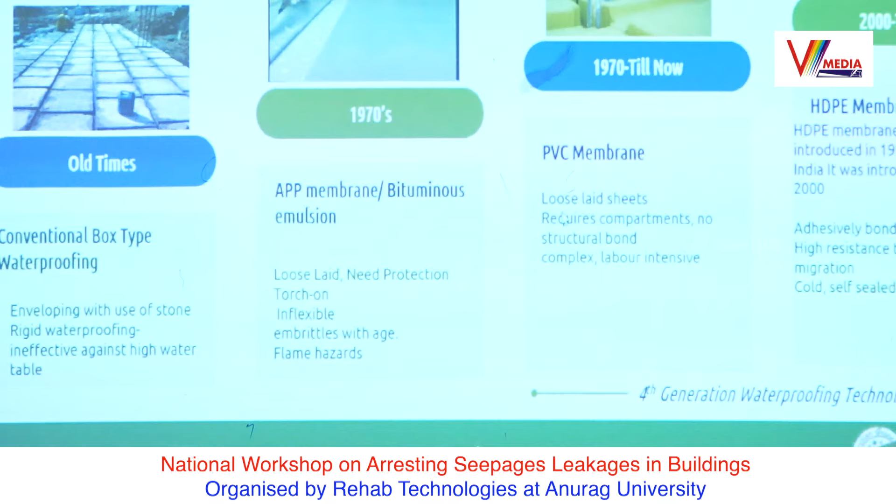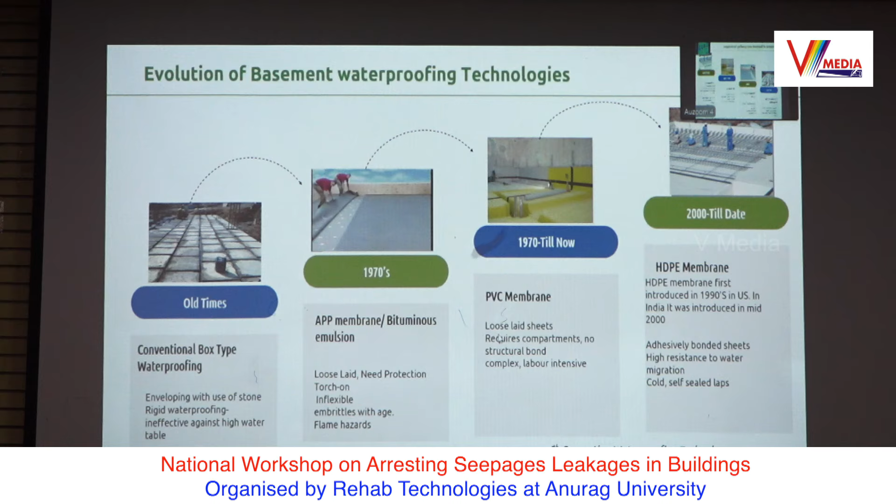So then the first generation product, called APP membrane and bituminous membrane, came into the picture. What is APP? It is basically an atactic polypropylene based product, a polymer based product actually. It comes in a sheet, black color sheet, like two gentlemen fixing the sheet on the roof. It was loose laid and needed protection.

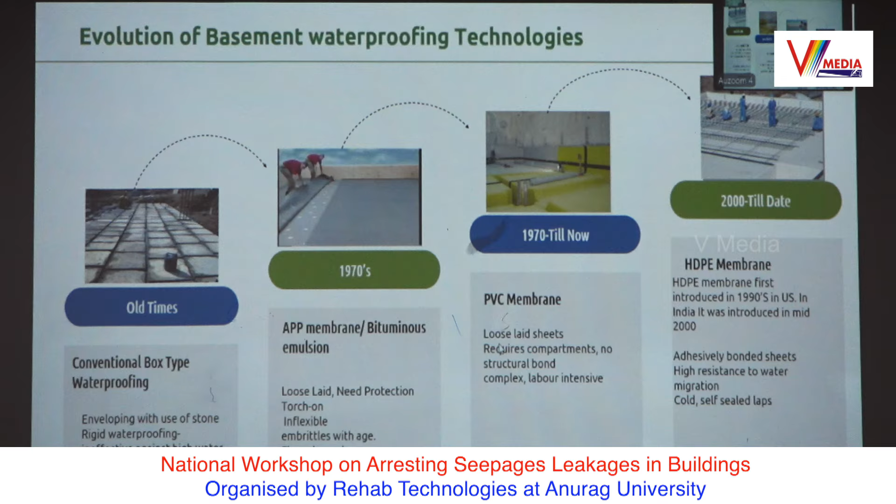The awareness of waterproofing was very less, but in the 1970s - we are talking not in India, it is outside India, where people started long back - after that, PVC waterproofing came.

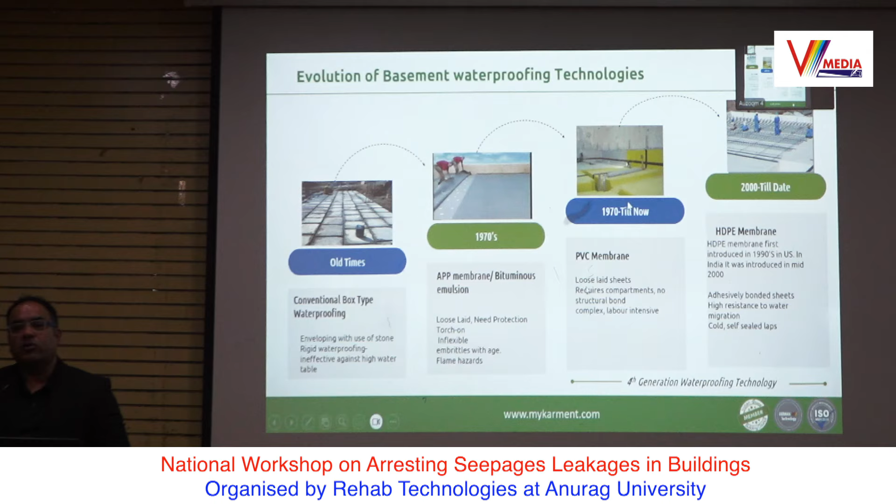PVC is nothing but polyvinyl chloride. Again, it's a component drawn in the form of sheets. You must have heard of PVC pipes - everybody has seen a PVC pipe. At a certain temperature, they draw that material into sheets, and that again gives a lot of protection.

So it is mostly PVC and SBS membrane. The difference between them is the flexibility part.

We should be aware of the weathering effect of any product. Anything we design today, as per EIL or big departments, whoever designs the subject - like IITs - they normally design a structure for 100 years. So when they design a structure for 100 years, the material has to perform in line with the structure. That's why you can see the advancement we carry today in building materials.

This is one of the reasons - today we are more eager to have structures protected for more than 100 years, even 200 years. Some people are asking for warranties of 50 years nowadays, so these are things where we require advanced materials.

One of the advanced materials - it's not very old in the market, almost the last 8 to 9 years - is called high density polyethylene membrane, and it supersedes the majority of membranes in substructure waterproofing. The complication was, whenever you have a steel design, sometimes the tower is almost 80 floors - you can imagine the raft, the depth of the raft, the kind of steel they will use there, it will be very dense.

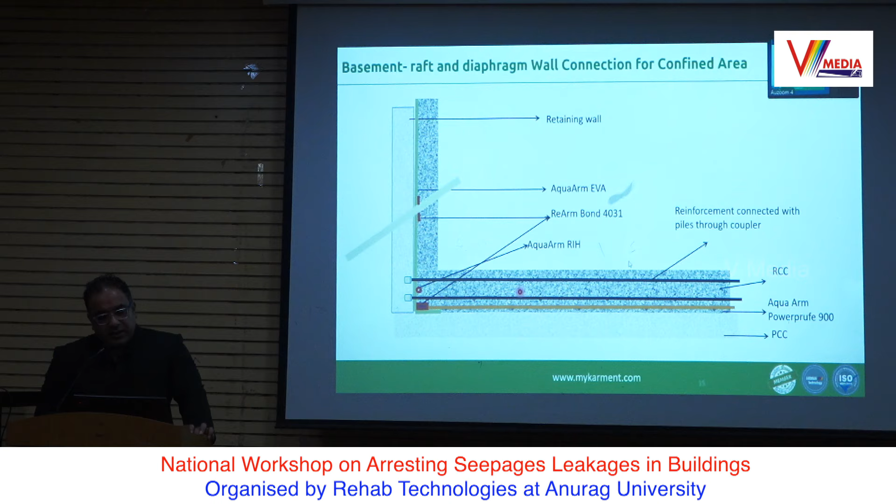You can see this is the internal area, wherever you go in the basement normally - this is the internal area, and this is the outside area. We call it confined and non-confined area. This is the typical way we do protection from the outside, not from the inside. Any kind of protection we do is from outside, not from the inside.

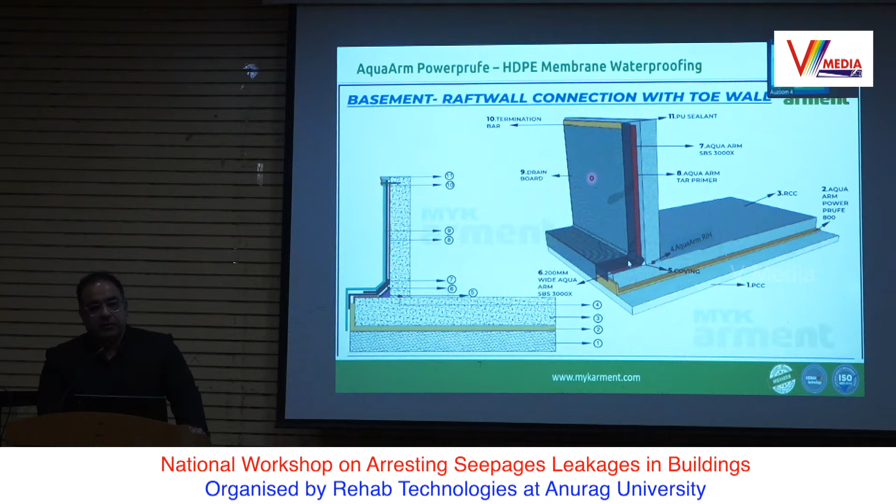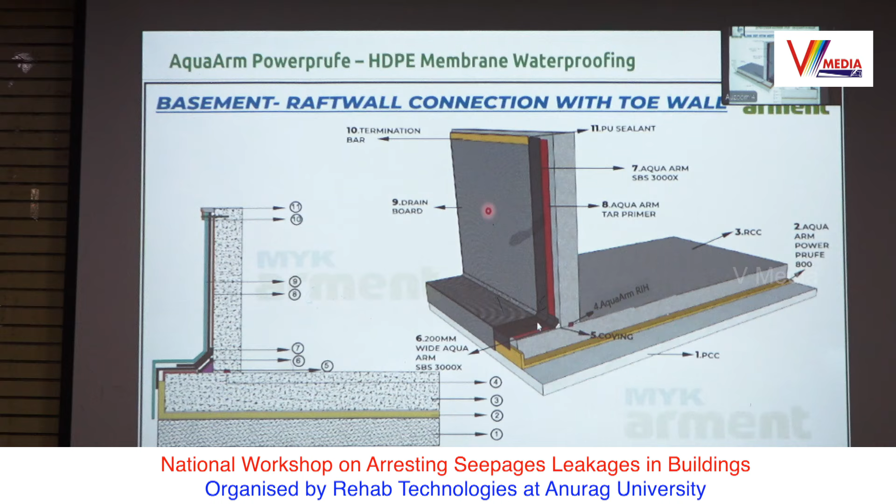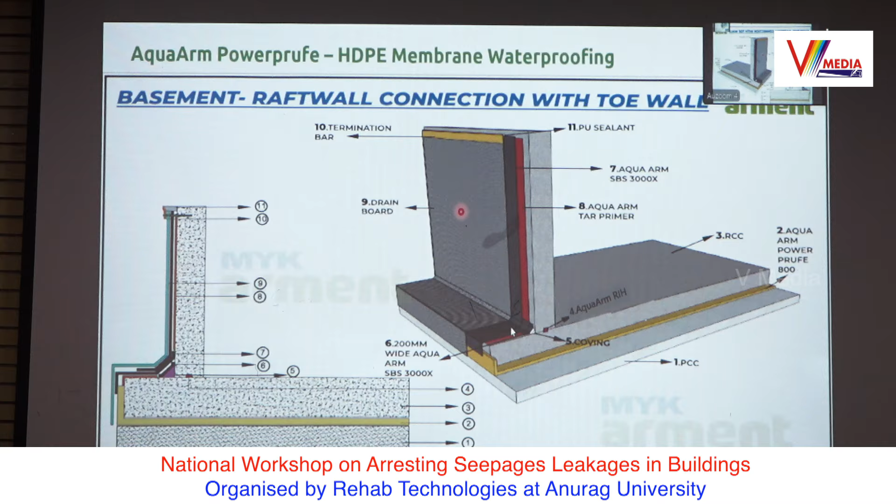So you can imagine a bucket. A bucket has water, right? You put water inside the bucket. Imagine you are doing protection of the bucket from outside, so no water can come inside, right? Only once you put water inside does the bucket get filled. This is the simplest way of understanding basement waterproofing. We call it a cascaded system from all around, and we will not do protection from the inside - it's not good under negative pressure.

So again, these are some typical diagrams I am showing you. Different combinations, different products together make one composite waterproofing system, which we guarantee sometimes for 15 years, 20 years, 50 years, depending on the workability of the work.

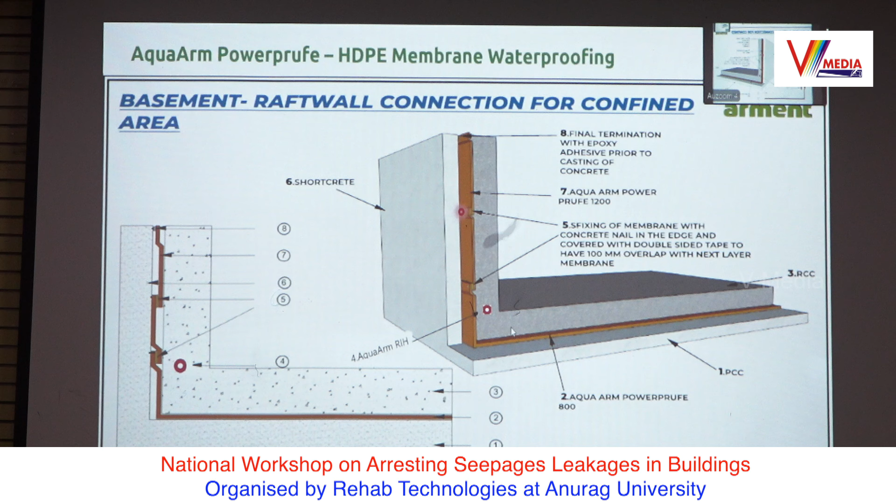This is the example I was telling you - this kind of steel you can see everywhere, or these kinds of piles you might have seen when you go to Hyderabad, in High-Tech City, Financial District, or even Kokapet. You see a lot of buildings have piles. What is that actually? There are a lot of designs in foundations nowadays.

The membrane can take the shape, and it is cold applied - no hot air is used. This is the normal practice we do. We understand the surface, whether it is hard or loose, and we have to clear it off. Then, before laying the membrane, we have to loosen it because it comes as a long roll, and sometimes it has a lot of curves.

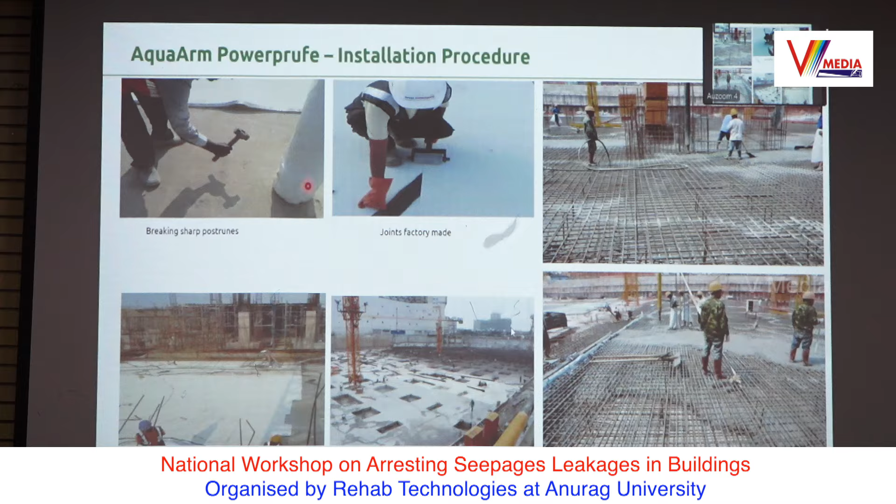Then we do the joints - there are very nominal joints at the corners. The membrane almost stands here, you can see. It is 1 meter by 20 meters. Normally you have fleece on both sides, 50-50 mm. There is a sticker there; you remove the sticker and straight away apply the material on top.

Imagine this is one of the typical sites you can see. So how do you apply the membrane? You can see the blue and white color - that white color is the high density polyethylene membrane. Okay, was that interesting? Good.

Now the second interesting topic I'll take up on waterproofing is roofs. The roof is not just a roof anymore nowadays - different places have different requirements, different uses. Some places have a car park, some want a roof garden, some have a lot of gadgets or fixtures on the roof. It could be a data center with thousands of things needing a lot of cooling. So a roof is not only meant to be a roof today - it has a lot of uses. Roof protection is very important.

Do you agree? When you design a roof, what considerations come first in your mind for any kind of protection system you want to produce? What should the system be? How should the system be? It should have good physical properties, right?

When you go for a purchase of a car, what do you see? It should be good looking, aesthetic, give good mileage, and it should be cheap. That is also in our mind all the time. But what happens when the dealer says, no sir, it is not cheap, you have to pay for EMI. This could be the parameter.

Same goes for any kind of building material when we choose for a building. The first thing in our mind should not be cost. It is a technical product. Whether it will work for my structure or not, that is the most important thing. So the most important thing will be good physical properties.

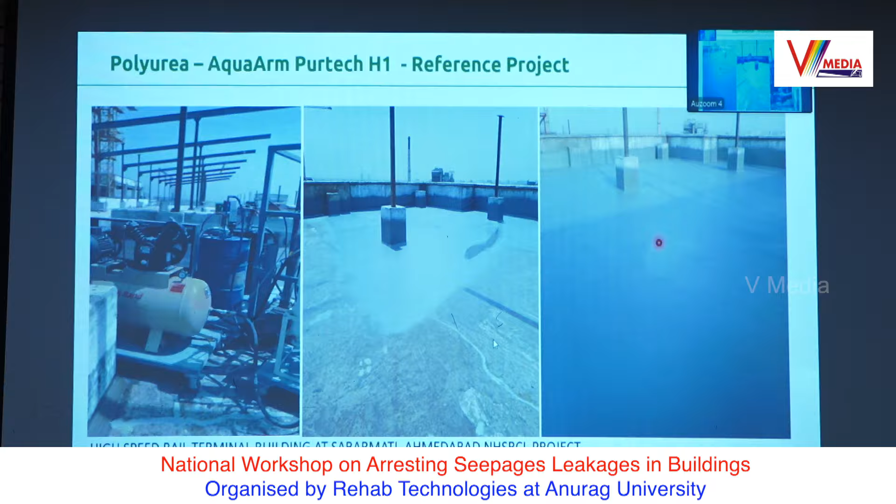These are some examples where we have done this, for one of the areas we have done. So you can see some videos so you can understand. This is one of the very typical machines which is normally used for spraying polyurea. Polyurea is basically a material with A component and B component.

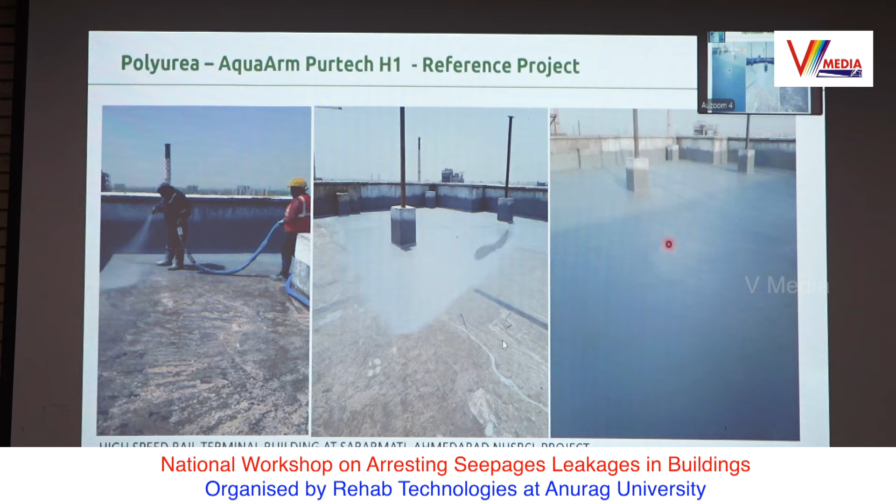Normally it's mixed in a chamber, a very specialized machine, more than 100 degree temperature is there. It decomposes the material and makes it in the form of a spray. Very different kind of product, very fast setting, it can set within 30 seconds, and you can move the subject on this coating after maybe 1 hour.

So this is one more product, this is for sunken areas. Sunken areas are one of the biggest problem areas actually. Sunken basically could be your wash areas wherever you have water inside your flat or building - it could be a wet area, a toilet, a laundry area, or sometimes a balcony. Those are the typical areas.

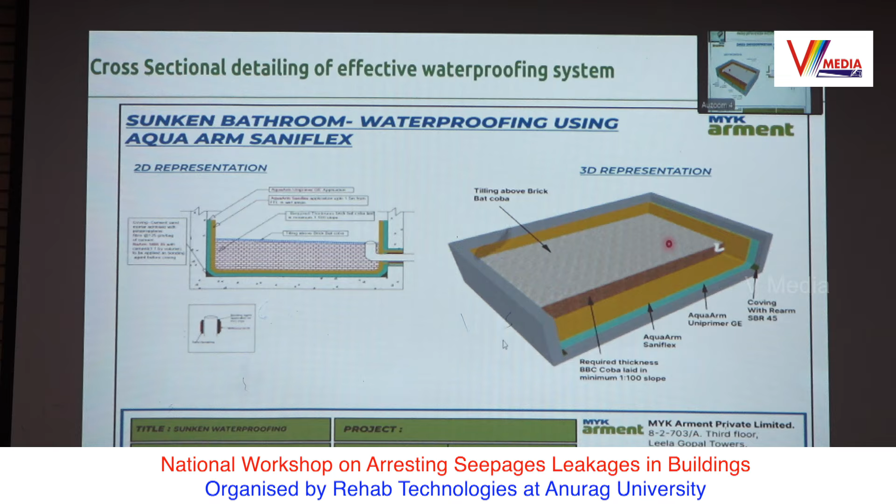So we have a product normally for when you do waterproofing in the bathroom - you will have different systems there. We give a very simple system. Let me show you with a picture now, better. This is a typical bathroom you can see.

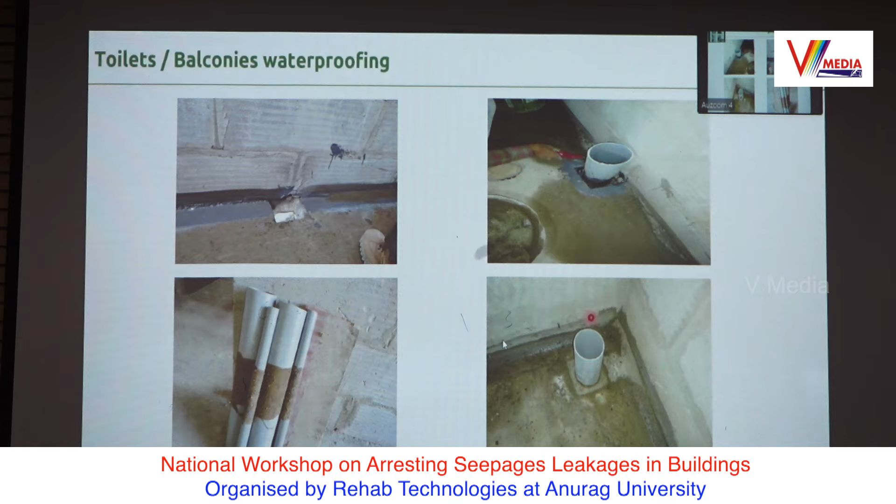Normally you do the core cutting here where you have to put your pipes. These are the pipes typically. You have to do a little working on the pipes - you fix your pipes, do the grouting on the pipes, and the pipe is ready for the commode or whatever you are using. Once that is done, we have a specialized material called Saniflex.

Saniflex is a vulcanized rubber based product, which is hard to find in the market. We are the leaders in this product for the last 25 years. The exclusivity of the product is that anybody can visualize with the eye that this color is very clear, yellow color.

So nobody can cheat you saying waterproofing is done, but after 6 months you see the leak is there. This is a yellow color coating, 2 coats, 1 primer coat, and you make the fleece like that. Once you do that, the structural waterproofing will be 100% intact because you are first treating the areas where you can have a leak.

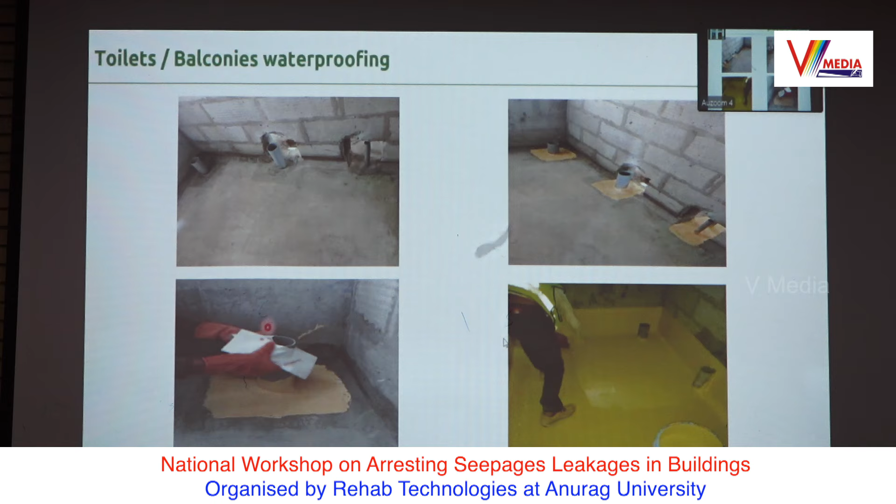That is all your penetrations. Once your penetrations are done, this is the way of the sleeve we do - below is the waterproofing, then a specialized rubber based product which requires plaster. So it will add another extent of dead load on the structure. Dead load is a different component, we can discuss some other time - I have done a lot of research on dead load and how it changes. So small things make a difference in the structure.

Now I will give you another brief area - like when you have gone to any kind of industrial plant. We are talking till now about buildings only, but a building can have different uses. When I have a building which manufactures electronics - everybody loves iPhone, right? Now iPhone is going to be manufactured in India. When they want to manufacture in India, those facilities will also be of very high standard because they are going to manufacture high standard products.

So we have products which go into the electronics industry, food and beverage, any kind of engineering, institutional, logistical, pharma - we are almost supplying to the majority of pharma here, automobile, textile and chemical. Now you will think, what is that actually? I was talking waterproofing, but why am I talking flooring now?

So flooring is also a protection. It is a protection, but we don't term it as waterproofing. It is a protection inside and it covers your concrete in such a way - the thickness is not very high, not more than 1000 microns, around 1 mm, but it can withstand pressure, acidity, any kind of chlorination, any kind of sulfuric acid penetration, and any kind of water ingression also. So it protects your structure from inside, right?

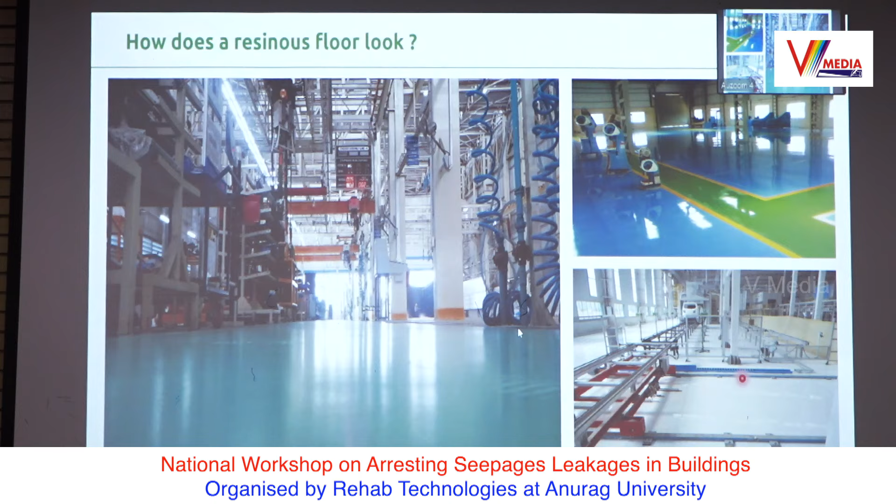Clear? So these are beautiful pictures you can see. It is not costly actually. The thing is, if you go to any basement, it feels very shabby nowadays, smelly, dark - we don't want to park our car there sometimes. It might be good at the beginning of construction, but after 3-4 years, no oil spillage, no tire marks, no smell. Majority of big cities in India - we work exclusively with DLF, Sobha and Godrej. Pan India, we are the only supplier for them, supplying all these products for beautification. The idea was to give them aesthetics - when anybody enters the building, the first thing he will go to is the basement.

So those products are not very expensive and it is a very open technology now. No, only for the basement, sir.

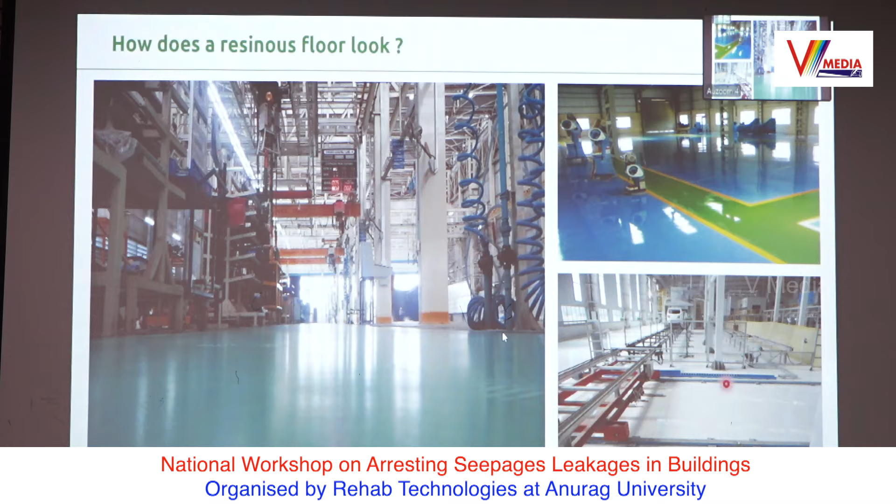Only. Don't forget, before any treatment you do on the surface, always check the moisture. Is it moisture tolerant or not? It should not absorb water, because only when it doesn't absorb water will it create a film. So we should always understand the moisture should not be more than 3%. Anything more than 3%, we should not apply any kind of waterproofing or protection. Simple terms, simple things.

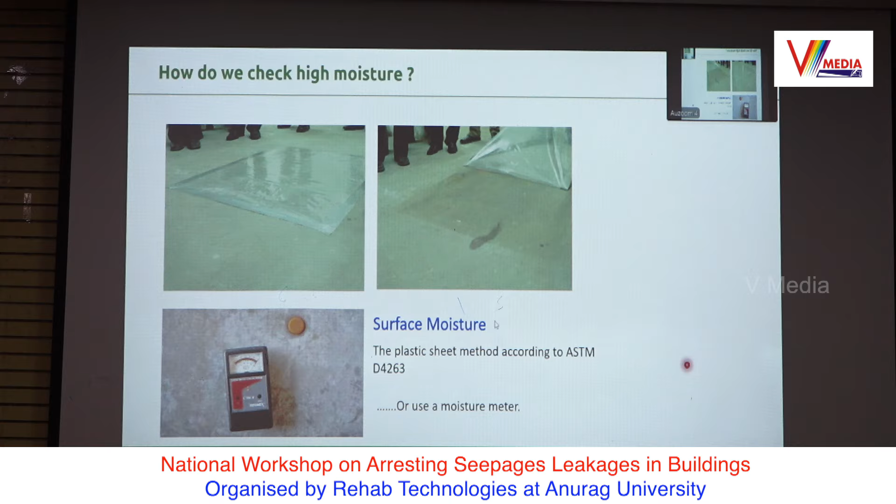Yes sir, there is no flooring tile now, only RCC will be there. You can do it on RCC also, or they might do a screed. VDF is not always required. In India they require VDF a lot because they don't do correction in the screed only, in the RCC only there is no slope. But internationally, how they say it should be done on the RCC actually, because RCC already comes with the slope there.

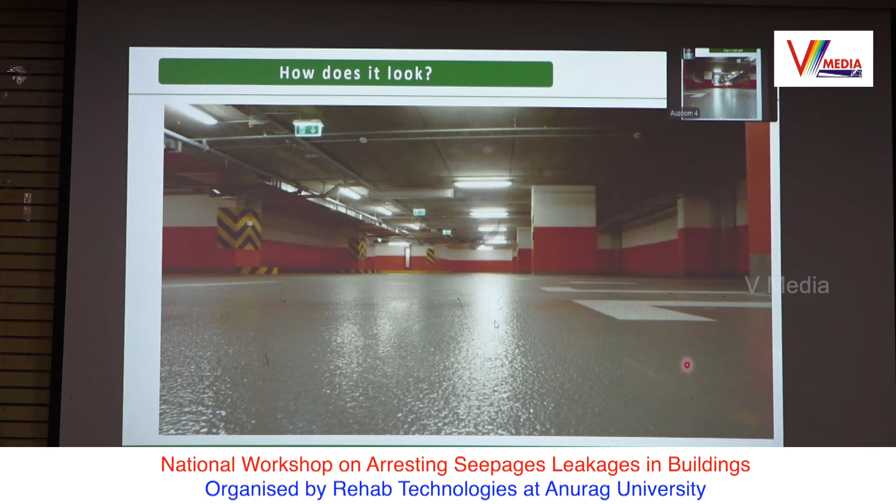It is anti-skid, that's the class of the product, it doesn't let your tire skid. That is the first property. Abrasion resistance is the second, because it will not degrade your floor further. It is giving gloss at this point because it's night, but you can see this is the matte finish now, there is no gloss in that.

So last point now, the biggest area you have where you have leakage. Nobody has spoken till now, I think I am the third speaker only.

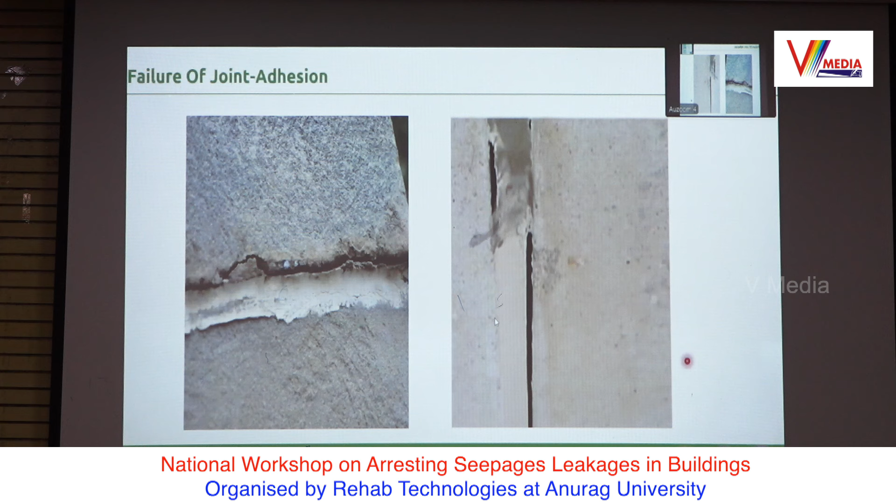Any podium, any roof, any place you have a leakage which will be from the joint. These are typical things which you find normally in your buildings all the time. In your nearby, you will see always sealant is cracked, corners are broken. So what is the problem here? Why does the sealant crack?

See, sealant has a component called MAF, movement accommodation factor. How much it can move, it can take elongation, and it can have coefficient of restitution sometimes - how much it can expand, how much it can come down. So what happens sometimes, we don't choose a product which has a higher MAF. I will choose a rigid product and drive my car every day over it. So what will happen? Rigid product will break, right? It might not break from the middle, it will break from the corners.

So these are like two ions, hydrogen and hydrogen, H2O, H2O. What is that? Basically H2O, water, right? So water will always try to break the adhesion. Any kind of adhesion you have on the corners, like if you see on my previous slide, it will try to break it, see the picture is here, right? So water should not go inside.

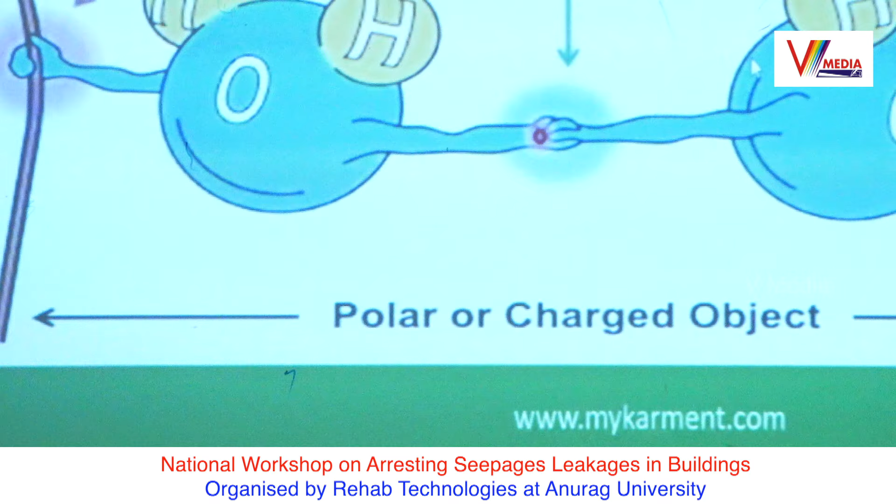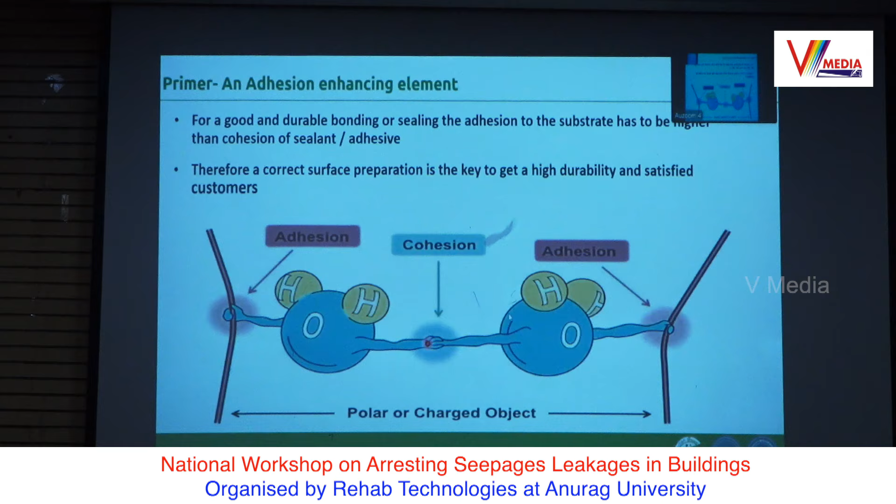So these are like two brothers actually who want to go inside - this is a little joke part I've made. There are two brothers, water this side and water both sides. The moment they join hands, it will start cracking if you don't use a proper MAF. MAF is modulus of movement accommodation factor. So if you use anything around 25 joint, you have to use a MAF around 10. If it is too rigid, these two brothers will succeed in making a crack and water will go inside. Most of the leakages in Hyderabad today are from these two brothers only. These two brothers don't want to leave the joint as it is, they will make it crack and cause a leakage.

Adhesion is basically - when you have a substrate, we are talking about a concrete surface here - the bond between the material and the surface, that is called adhesion, sir. And for that there is a specialized primer first. Primer will be done, normally the bond will be between the sealant, primer and the concrete. So failure should be from the concrete if it is a good product. But normally what happens in all our joints, we don't use primer. We straight away put the sealant, and in the sun, UV, this thing, it cracks, chalks.